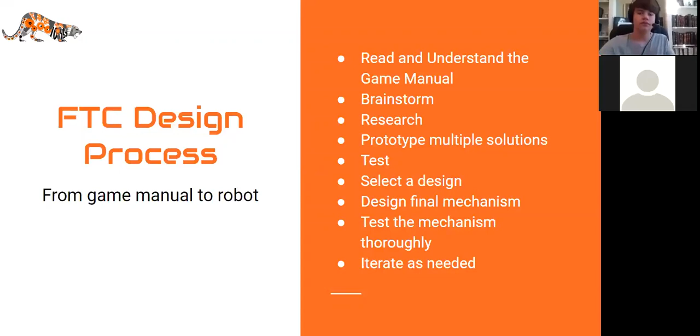The first steps are reading the game manual and discussing it with your team. Usually after kickoff, we've watched the video and come back to our room and pull up the game manual to look through all the relevant stuff to make sure we all understand how exactly to play the game, because the video at kickoff will be a bit vague with some stuff that's poorly defined. So you really want to read through the game manual and figure out exactly how to play the game legally, what scores points, and come up with a strategy.

After that, you do an open brainstorming session, asking for ideas on how to solve the problem. Let's say if you got to pick balls out of a crater, how do you solve that? Get everyone's ideas, no matter how crazy, write them down, maybe on post-its or a whiteboard. Spend a good while getting a lot of ideas out there, then figure out what ideas could be combined. If you have two similar ideas, can you combine them into one?

Are there some that are just not feasible? Is someone wanting to do a vacuum to vacuum up balls? That's probably not feasible in FTC, probably something you shouldn't prototype. Then just narrow it down to select a few options per mechanism to prototype. We usually give one or two people each mechanism. If you're working on a mechanism, look on YouTube and FTC forums to see what others have done in the past for inspiration.

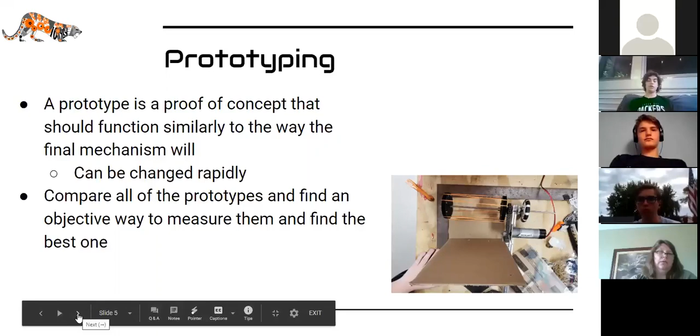So next up, you have to design and then build the robot. You've got to translate the prototype into a reliable and robust mechanism. If you see there in the center, that is what the prototype you saw before became. The collection thing with the rubber bands and CAD is what you saw in the prototype before. Yes, thank you. So you've got your prototype.

You don't want to deviate too far from it, because you know that works. You obviously will need to make some changes to make it work on the robot, but you want to keep the same principle and come up with a way to make that work well. So you've got to make a model of it in CAD, or if you don't have CAD or don't know how to use CAD at this point, dimension drawings can be good. Just make sure it'll fit in with other stuff in your robot and that it will fit and work.

When you're designing it, you really want to make sure to use strong parts and attach them sturdily. You want to have multiple points of contact, and when you build the final assembly, it should be fairly rigid and sturdy to withstand the force of gameplay, because when you actually are out there competing versus practicing, it is a lot more stress on the components.

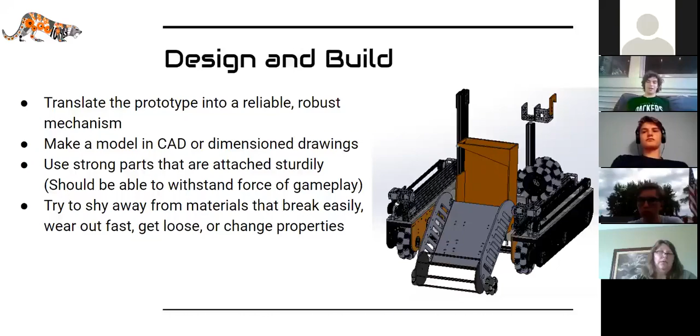So next up is testing and iterating. This is kind of the final spot of the design process, although it can loop around and you can do some more with it. Not everything is going to transfer perfectly into the final build. You're going to have CAD or drawings that may look good, but something goes wrong and it just doesn't work quite the way you thought it would.

So that's why you want to have all this stuff designed and built a few weeks before the competition to work out these kinks. Some issues may require a slight redesign, so you may need to reprint a 3D printed part. Some may require changes that are very janky if you're close to a competition, or it's not pretty, but it works pretty well.

As you can see here, one of the things that's not pretty but works really well is this REV bar on this collector. So Razzlemon, if you can point at the collector. Oh, not at the collector, my bad, the deposit mechanism. To the upper, there you go, right around there. There is a bit of silver you can see, and that's a REV bar that we put on there to weight it down. It wasn't in our original design. It's not exactly pretty, but it works really well.

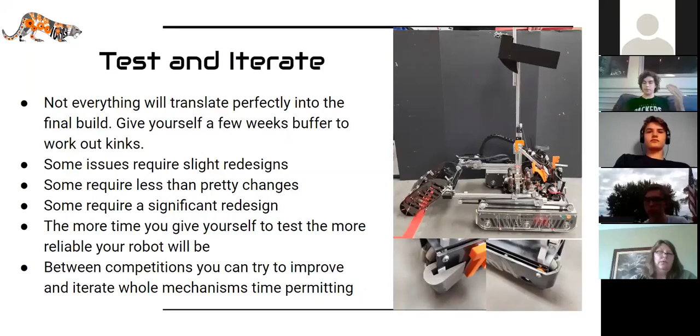And some things you want to consider when making your drivetrain is you want to think about how fast you want it to be, how much power you want it to have, how maneuverable you want your drivetrain to be, how much traction your wheels are going to have, and what type of terrain you have to go over, and if you want it to be omnidirectional, which means it can move in more directions than just forward and backwards.

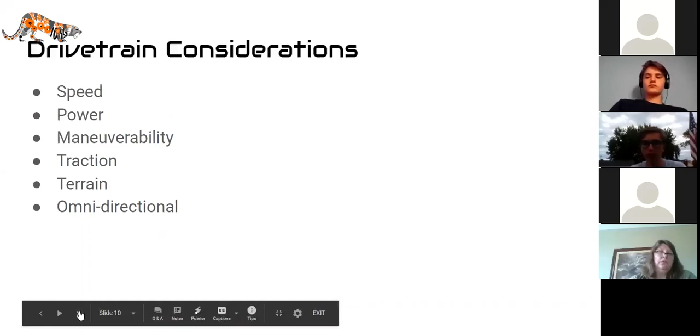So probably the easiest drivetrain to build is the 4-wheel. And so there's really three main different ways to build a 4-wheel. But at its base, it's just 4 wheels with a motor attached to them. There's nothing complex. But you can change it depending on what wheel you do. So if you use just normal wheels or like 4 traction wheels, you can get pretty good traction, but you're not going to have as great maneuverability.

But if you have 2 traction and 2 omni wheels, which are wheels that have rollers on them that allow you to go forwards and side to side, then you're going to have this off-center rotation and you're going to have pretty good traction while still having good maneuverability as well. Unlike the 4 omni wheels, which you're going to have very, very good maneuverability, but you're not going to have nearly as good traction, so you're going to be able to be pushed around a lot during gameplay.

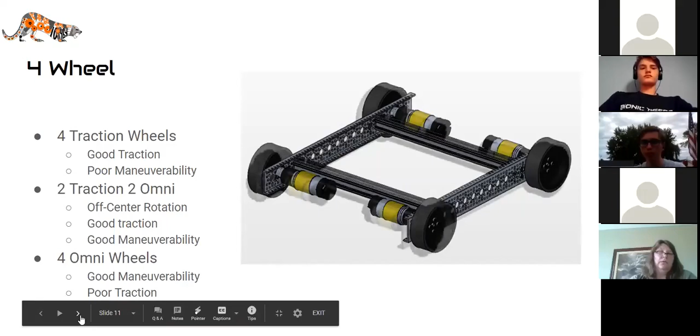So the next drivetrain we have is our 6-wheel drivetrain. And this design is actually one we used back in Rover Ruckus. So the pros of it are it's high traction, so it's really easy if you want to push other robots around, and it's really hard for other robots to push you. It's really quick because you got all your motors driving in the same direction, and you have very little loss, like slipping or anything like that. As well as it can go over difficult terrain. So like this past year, it could have easily gone over the center if you needed it to.

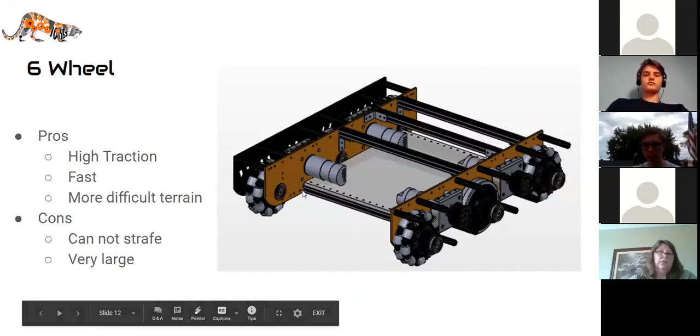However, it can't strafe, which is a big downside, because a lot of times in FTC, it's very helpful to be able to adjust side to side without having to back up and turn. It takes a lot less time if you can strafe. And it takes up a lot of space within the size constraints of your robot. So as you can see, it takes up our whole side on each side, as well as the motors come into the center. So it's not ideal to have that much space taken up.

And then we have our Mecanum, which is great because it can strafe. It's really high maneuverability because of that. So it can go all over the field. And if you want to, you can even design it to work around terrain. Like look at 7 Sigma in Rover Ruckus. And it's really useful in almost every single year of FTC because of the fact that it can strafe and move really quick. However, most designs of Mecanum drives only work on flat fields, pretty much.

So it's a lot more work to get it to go over terrain and stuff like that. And it's a lot more work to program it because of the way that the wheels function. You have to create a drive system that does all the math within your program to drive in a direction rather than just running all your motors in one or another direction on one side.

So next up, we have the X Drive. Some of the good things about this is that it can maneuver very well, and similar to the Mecanum, it can strafe. Some of the things that aren't so great about it is that your motors are going to be facing in towards your robot, and that's not always great because that takes up more space inside, whereas with some of the other drivetrains, you can hide them a little bit better. And it takes up a good amount of space. Similar to the Mecanum, it also is pretty complex to program because you're not just going to be going forwards, backwards, and turning. You've got to run the wheels in ways to strafe and stuff like that.

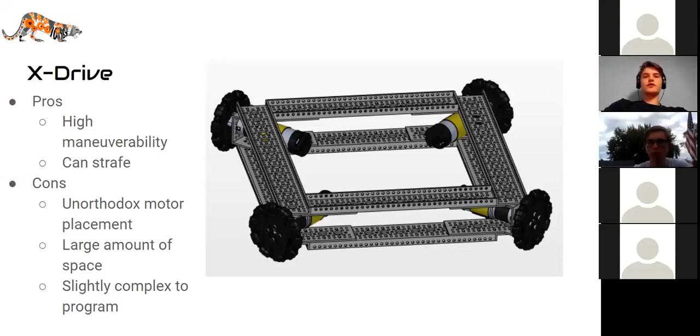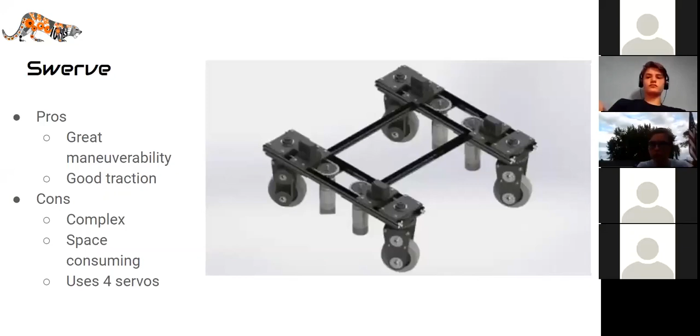All right, so I saw one question come through. For the drivetrain with 2 Omni and 2 traction wheels, where would the Omni wheels be placed? Yeah, so typically the Omni wheels are placed on the front of your robot, both of them on the front. And then your higher traction wheels would be in the back. So say you want to turn, the back of your robot won't move while the front of your robot will be turning.

So it's just a different type of rotation. If you've ever seen a cart that has 2 swivel wheels in the front and then the ones in the back don't move, the front of the cart is really easy to turn, but then the back won't turn. It's just like that.

Awesome. Max from 8 to Automate asks, can you explain strafing? So strafing is basically the ability to move your robot not only side to side, but in any direction without turning. So basically, if your robot is pointed at something, and you're slightly not lined up, you can shift sideways to get to a point where you are lined up with that thing.

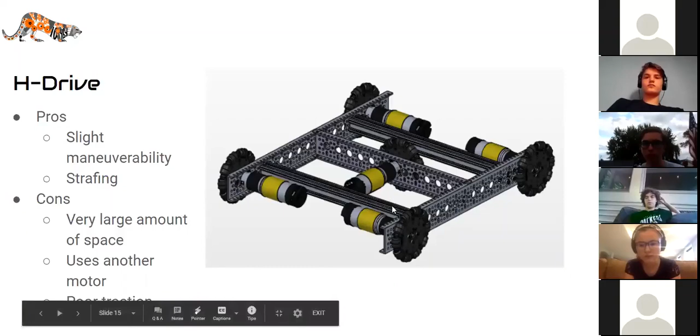Which drivetrain seems to be the most common based on your experience? So honestly, a lot of it depends on what the challenge is and what you can do. The most common and the most versatile by far is the Mecanum wheels and the Mecanum drivetrain, because it's got a good balance on maneuverability and traction, but it is a little bit more complicated to do.

It does work in most cases, but if you're just starting out, something like a four-wheel might work better. So a lot of it depends on what your challenges are and what your resources are.

In most cases, Mecanum is the more well-rounded solution, but one thing to point out is Mecanum wheels are much more expensive. If you're on a tight budget, they're probably not the way to go—a full set on goBILDA is like $160, which some teams may not have the budget for. I would not recommend Vex Mecanum wheels; they're cheaper but probably not worth it. A good set of Mecanum wheels, even though expensive, is worth it.

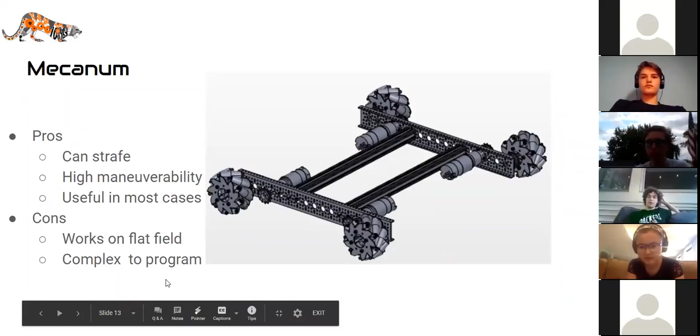Next question: when deciding between two prototypes, even if one performs better than the other, do you keep in mind that there could be a significant difference in performance when mechanisms are turned from a prototype into a final version?

One of the things you want to think about when prototyping, if one mechanism performs better or worse than others, is why it's performing that way. If it's because something on your prototype is spaced slightly wrong, I'd try to fix that to get your team the best available design. But if it's something like a wheel intake causing your game element to flick around, and that's an inherent issue with the prototype design, that's obviously not the correct design.

It's important to keep in mind that there can be slight performance differences from your prototype to your final, but you have to think about where those differences come from—is it through differences in build quality, or is it actual design differences? If it's design differences, go with the best design. But if build quality is causing the issues, you might want to build a slightly better prototype to see if it performs better.

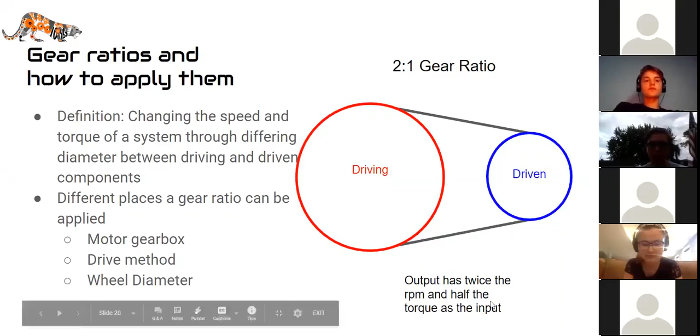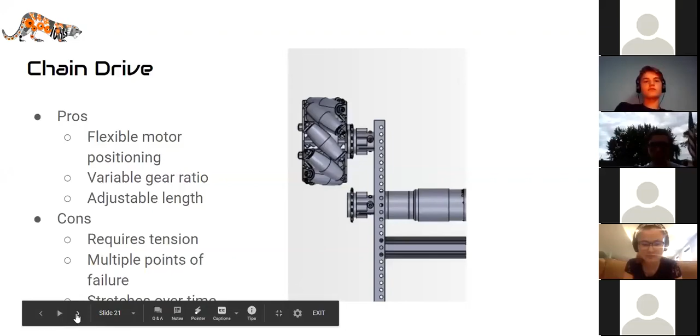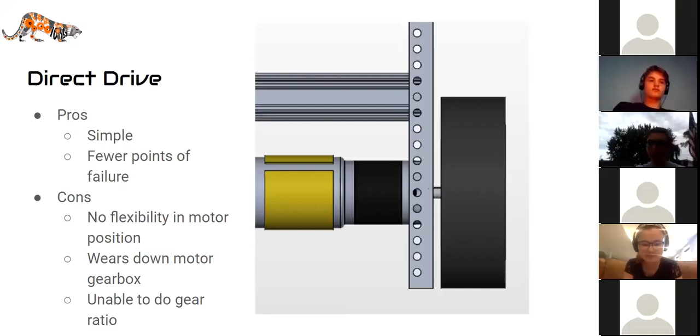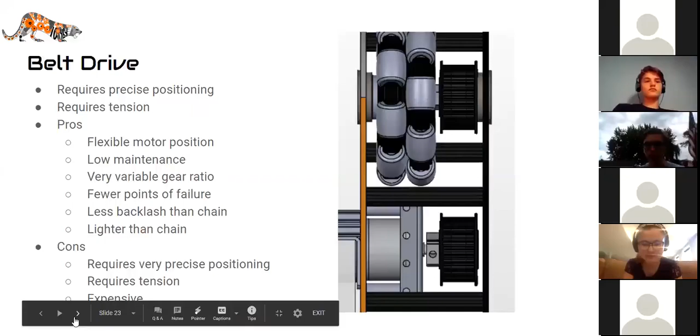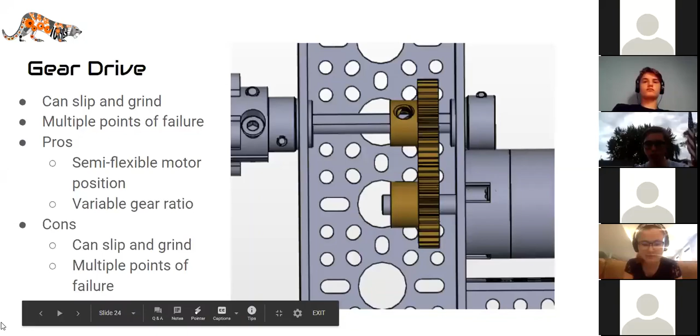So now some tips and tricks. One is to make sure you take advantage of the shape of your shafts. With D and hex shafts, if you're 3D printing or something like that, you want to print pretty close to the shape of that shaft, so you get the inherent rotation from the shaft without a lot of loss. If you try to do this on a circular shaft, it's a lot harder to get something to spin correctly.

You also want to use consistent structure pieces, and one that's really common is goBILDA channel pieces or Tetrix channel pieces. Those give you pretty good structural integrity, as well as a lot of mounting holes that you can build off of.

Another thing you want to do before you get into building your robot or any of your big assemblies is try to CAD it, so you have a full design of your robot put together. That way you know what you're doing before you just go start building things.

You also want to plan your drivetrain, which is another part of CADing - planning out every single mechanism that's going onto your drivetrain. You're making sure you give each mechanism enough space to function properly. And if you have mechanisms that lead into one another, such as a collector going into an output, you want to make sure you have a really good transfer in between those two.

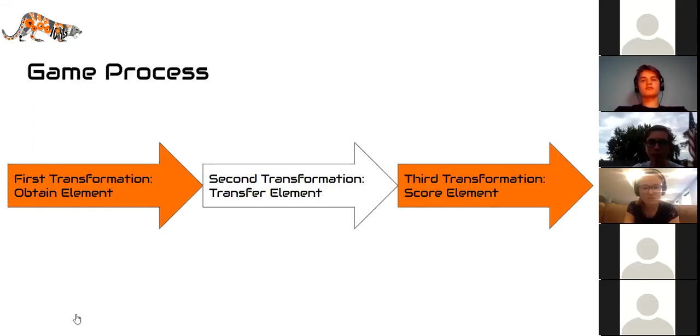First, we're going to talk about obtaining elements. Here are some historically common ways to obtain elements that we've seen in FIRST. Based on the element type, it's obviously going to vary - if you're picking up cubes, it's not going to be the same as if you're picking up stars. But mainly we've seen grabbers or claws, overhead spinning with rubber bands, dual-side spinning with usually compliant wheels, which are basically squishy wheels, or we've seen passive things like a forklift.

Like I said, it depends on the element type. In the past, we've seen spheres, cubes, and some unorthodox shapes like donuts.

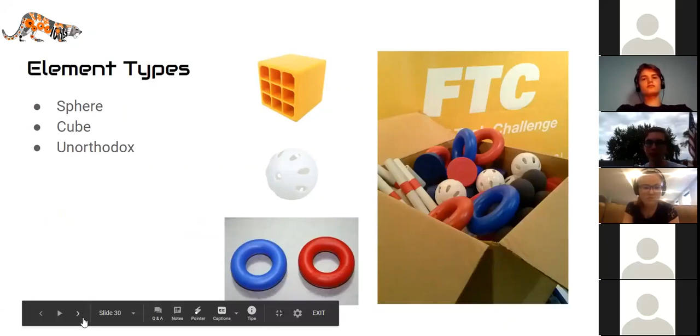Like we've done for other mechanisms or other parts of the build, here's some things you want to consider. When you're building a collection, you want to think about making it 100% reliable, because you'd rather have something work 10 out of 10 times but low scoring, than work 1 out of 10 times high scoring. You also want minimal lineup, meaning the amount of time it takes to pick it up - maybe all you have to do is drive into it, instead of having to perfectly come at it at the right angle, which takes much more time. You also want it to be fast, because the faster it is, the more time you save. You want it to be very versatile, so if an element has fallen over, you can still pick it up and it won't matter. And you also want to think about the shape of the thing you're trying to pick up.

However, it usually has a very limited range of motion. It can only really pick up one of those objects at a time. It requires pretty precise lineup a lot of the time. So if you watch some relic recovery videos, you'll see a lot of teams spent a good amount of time lining up their relic grabs, and it can be really time consuming to get that lineup. A big part of the collection process for grabbers is you have to get it exactly lined up to your piece, and then you can grab it.

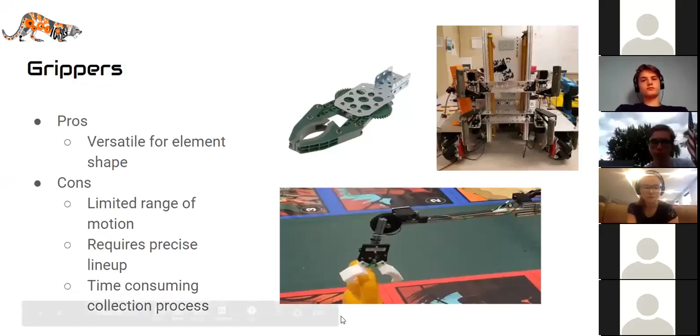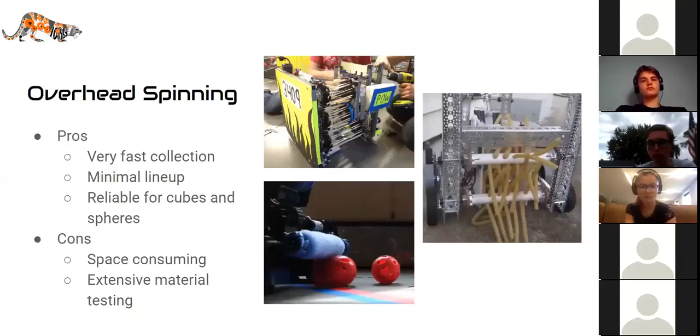However, as you can see in that top left picture, it takes up a lot of space sometimes—it's taking up the whole front of their robot, which means they don't get to put any mechanisms there. It also requires a lot of material testing. As you see, none of these pictures have the same material for their overhead intake, and it's going to vary a lot based on the speed you're doing, the placement, everything like that, on what material you're going to be able to use for your overhead spinning collection.

Similar to overhead spinning, there is dual side spinning. This was very common in this past year's game, if there's any second year teams. They are used for unorthodox shapes and cubes, especially if you're using compliant wheels, which will shape around the object you're intaking. They're very fast and very reliable. Some of the worst things about dual side spinning are that they do require some lineup so you can get it to go straight into the intake, and they're not very versatile—they have some limitations in what you can use them for.

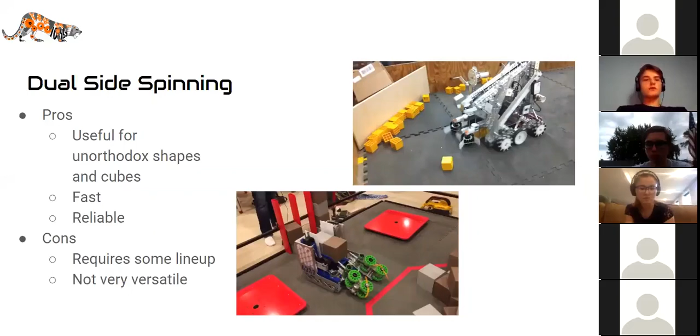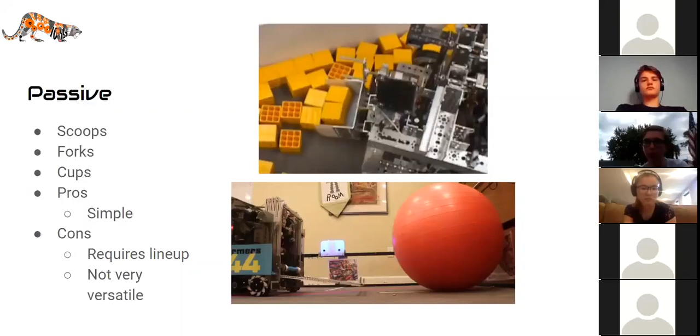Finally, we have the passive collections, which just mean they're not powered by a motor or a servo. These are basically like scoops, forks, or cups, which usually have rubber bands in them—you just drop it on and it will suck it up, and then you dump it out the other end. The pros of this are they're very simple to build and not complex to maintain. But the cons are usually they require an intense amount of lineup, especially the cups, and they're not very versatile, so usually they only work for one specific game object.

Once again, I'm not seeing too many questions in the chat. I guess you guys are doing such a good job presenting. But oh wait, there's one from Ivan. Would you stick with one vendor or try to mix and match? Can you provide some high-level comparison between Tetrix, AndyMark, REV, and goBILDA?

Generally, if you're trying to do parts from a vendor, it's best to stick with one vendor because they build everything to fit together. Multiple vendors' build systems often don't match up, so it's hard to combine things. One exception is Rev, because of their extrusion, you can slap that on anything since the screws can go anywhere.

For our team, our two most common uses are REV and goBILDA. We find that goBILDA tends to be a lot more stable than Tetrix, and it's generally easier to work with, as well as having higher quality parts than Tetrix. Rev is very versatile, you can use it on basically anything because the extrusion will fit on pretty much any hole pattern as long as there's a straight line somewhere in there.

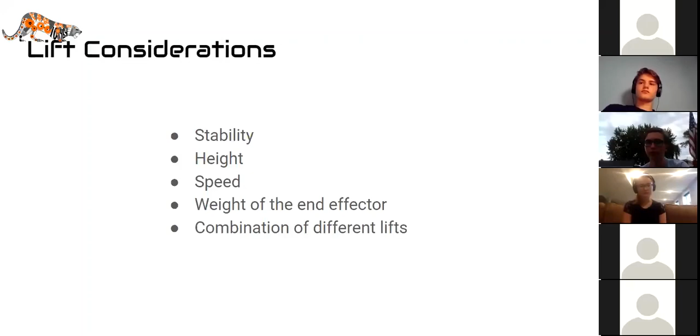The first type of transfer mechanism we're going to talk about is the single bar. This is one of the most simple transfer mechanisms there is. Basically, you attach a bar to a motor, and when you run the motor, the bar moves with it. It's very simple, but some downsides are that you don't have that far of a reach, and the game element will not stay at the same orientation. So if you pick it up parallel to the ground, it will not end parallel to the ground.

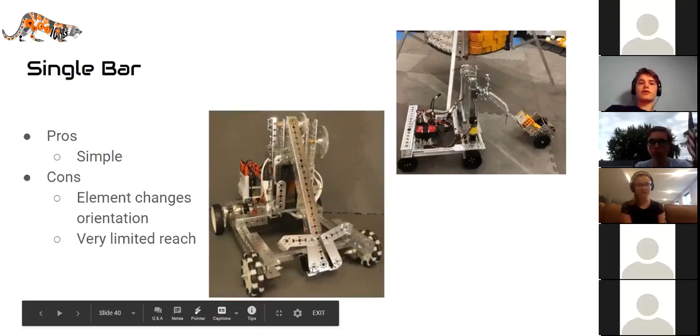So you don't get any additional extension out of it. You just get what it is. But it does maintain the orientation. However, again, you have to make sure you're not putting something too heavy on the end, so you're not gonna tip your robot over when it goes out the back or away from your center of mass, and you don't get much extension out of it.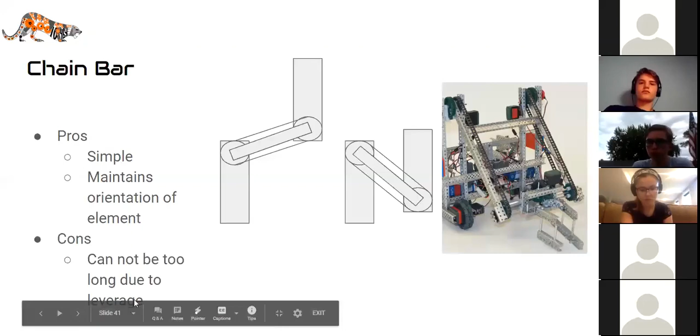So the next one that we have is a 4-bar linkage. There are a few different variations of 4-bar linkages. There's a 6-bar and a double reverse 4-bar. Some of the good things about 4-bar linkages is that they keep the orientation of the element, very similar to the chain bar. But unlike the chain bar, it's a lot more complex.

It also has a smaller maximum height because you have to keep it from starting inside of your robot, and you can't get it too far out from there. Once again, two of the different types are the 6-bar and the double reverse 4-bar. Those two are much more complicated than your simpler 4-bar linkage.

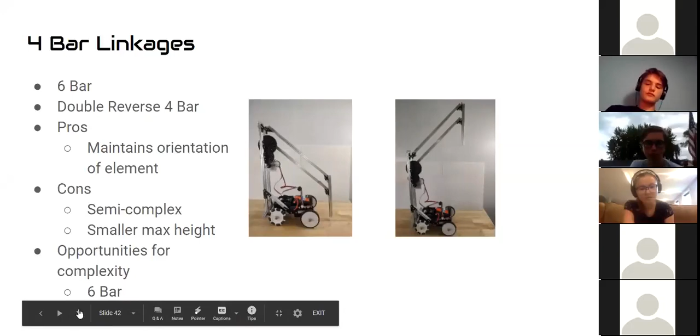Before I start the slide, one thing I also want to add when thinking about your lift is, with the first two types of lifts we talked about, you're going to be grabbing your thing from maybe the front of your robot, but you're going to be depositing it out the back of your robot. With these last two, you're going to pick it up in the front of your robot and drop it off in the front of your robot. So that's also one thing you're going to want to think about when picking your lift, is that some will change which side of the robot you're on.

So for linear slides, these are by far the most common thing you'll see in FTC. I know our team uses them almost every year, and I'm sure most teams do, especially for vertical lifts. And the pros are that you can add more stages to get more height. So really, you could go infinitely high with these. And like I said, they're extremely common. You see them all the time. And the cons are they can be semi-complex depending on the methods, which we'll talk about in a second. And they only go in one direction, so they'll only go vertically or only horizontally.

And another con is, if you want really high quality parts, they can be expensive. Like if you want the Misumi slides, they can be very expensive, so it's a sacrifice of, do you want nice clean slides if that costs a lot of money, or do you want ones that may not work as well, but they're a lot cheaper, like REV Kit.

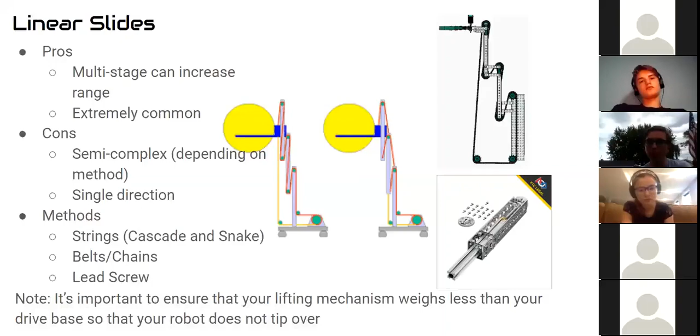And you can also do the snake with chains. If you want to do belts, you can do snake, but it might be a little harder to pull off. There are also many different ways that you can do an extension with belts, but they're much more complex. And you can also use lead screws, which many vendors sell kits for. These will give you lots more torque and power. Like in Rover Ruckus, when robots had a hang, we used a lead screw just because it had so much power behind it. And like I said, it's important to make sure that your lift weighs less than your drive base so that your robot does not tip over.

And so now we're going to talk about scoring elements, so how to actually get points. We're going to talk about some different scoring zones and some tips and tricks. In the past, we've seen scoring zones that involve launching, dropping stuff, pushing things into it, balancing on stuff, or lifting either your robot or something up. So really, it can vary every year based on what you're trying to accomplish at the end of your game.

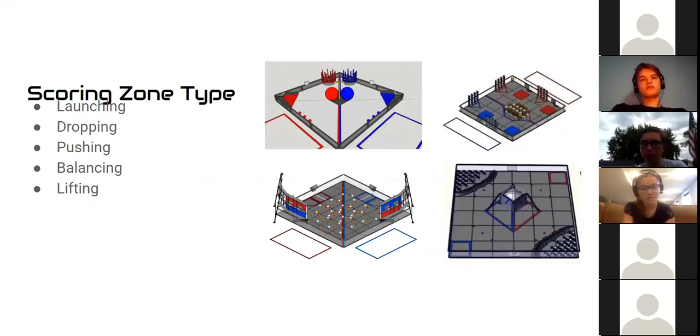And here's some tips and tricks for scoring elements. The main thing: keep it simple and focus on reliability. You obviously want it to be able to score the most points, and if you do that reliably, it will make you look good for other teams. Especially if you're a second round pick, teams are looking for reliability over one team that can score a lot of points in one of their matches.

Plus, you want to make it easy for the driver, because in a high stress situation, they want it to be as easy and as little stressful as they can possibly get it. Plus, research past games, especially ones that follow a similar suit with what you're trying to do, because you can get so much inspiration from those, as well as looking at other teams, seeing what they're doing, talking with other teams, connecting with other teams through outreach, and seeing, oh, maybe I can take some of this inspiration into my own mechanism.